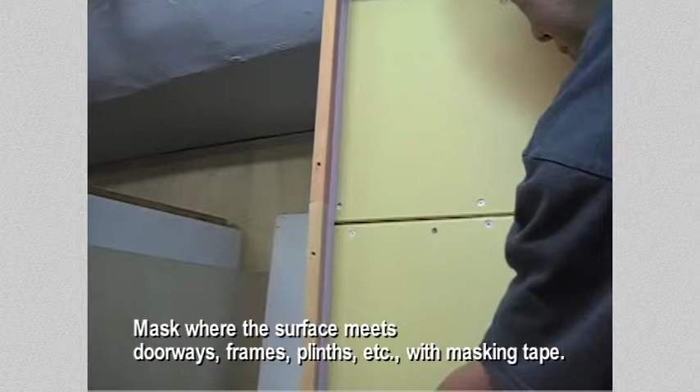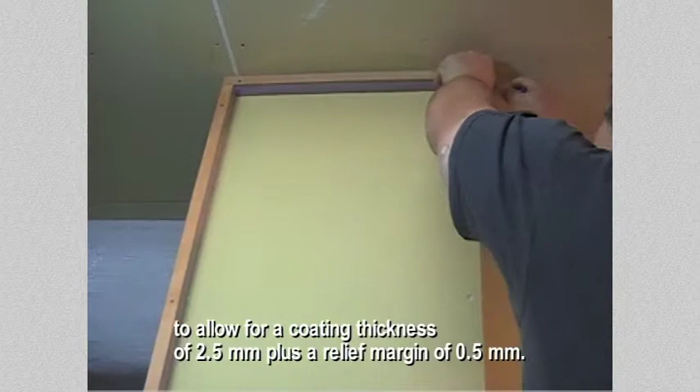Biocera Light. Application procedures. Base preparation. Mask where the surface meets doorways, frames, plinths, etc. with masking tape. Apply masking tape 3 mm away from the board to allow for a coating thickness of 2.5 mm plus a relief margin of 0.5 mm.

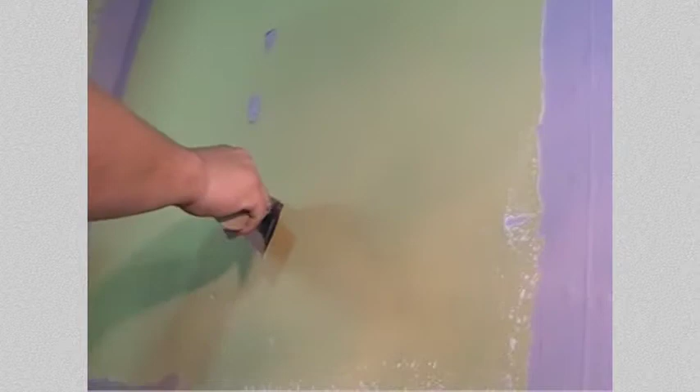Use only LN putty from our company. Mix 1 kilogram of LN putty with half a liter of fresh, clean water to make a paste. Mix only the amount of paste that can be applied within 1 hour. Cover the screw heads with the paste. Apply the paste 60 mm wide along the plasterboard joints.

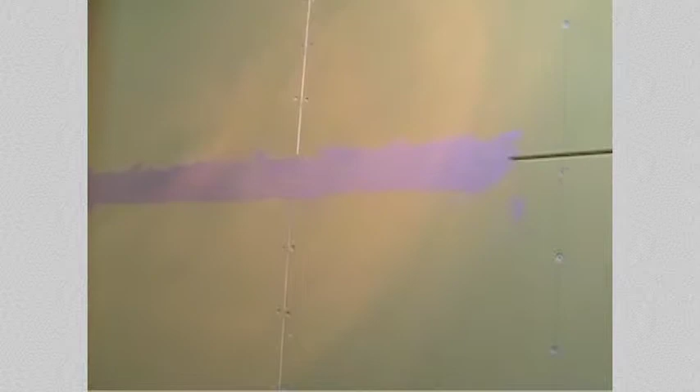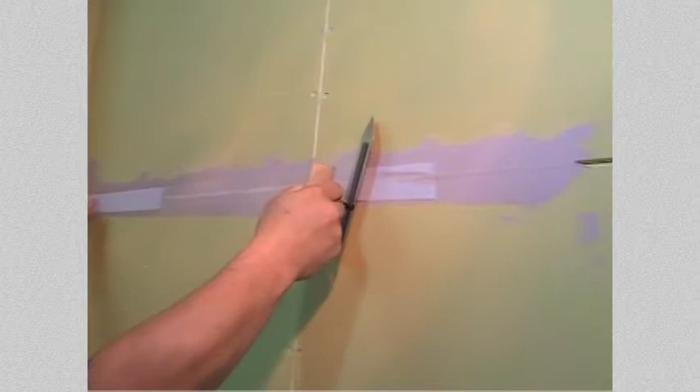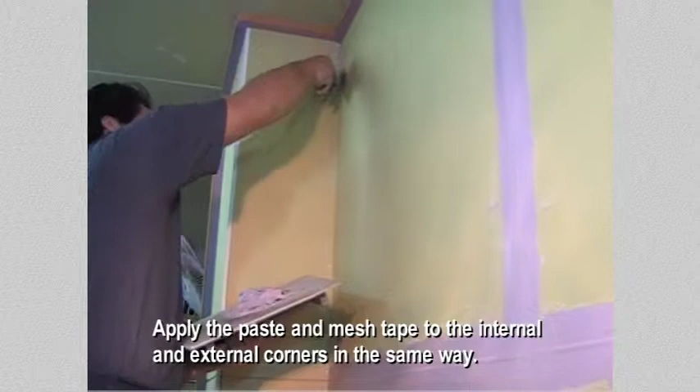Stick LN mesh tape on top of the paste and rub down the joint until it becomes smooth. Apply the paste and mesh tape to the internal and external corners in the same way.

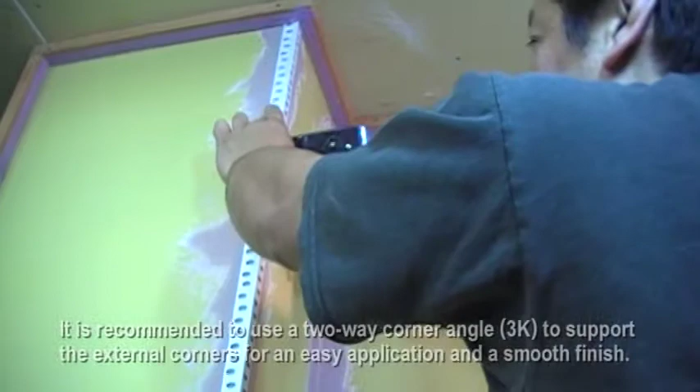It is recommended to use a two-way corner angle, 3K, to support the external corners for an easy application and a smooth finish. After a short while, the joint valleys may protrude. Press down the bulging paste with a trowel to smooth it out.

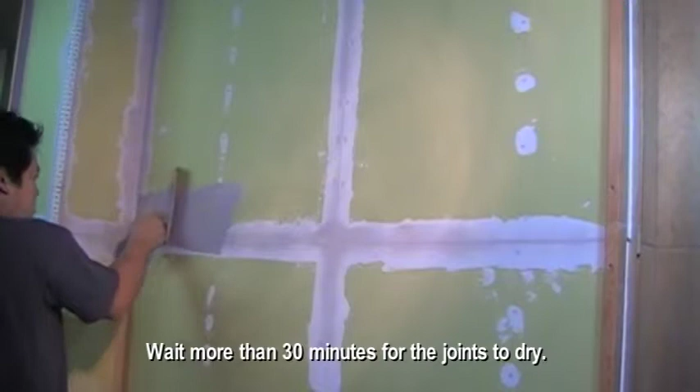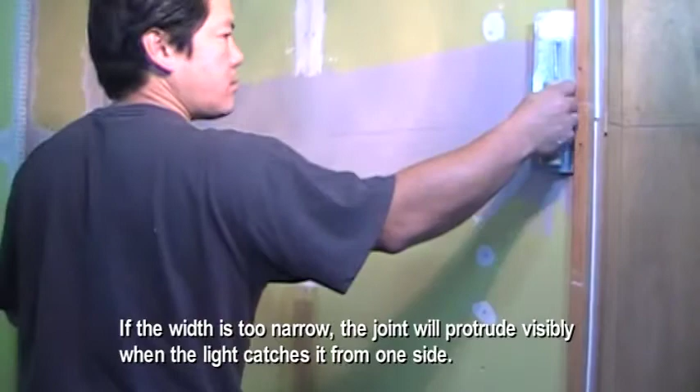Wait more than 30 minutes for the joints to dry. Apply the paste more than 250 millimeters wide and rub down until it becomes smooth. If the width is too narrow, the joint will protrude visibly when the light catches it from one side. The LN putty will turn white when it dries out.

Mixing. You will need to have the recommended amount of fresh, clean water ready. Pour some of the water into a plastic bucket for plastering, 300 millimeter diameter, first, and then add the product, and mix them with the high-speed agitator. Gradually add the rest of the water and the product while mixing thoroughly.

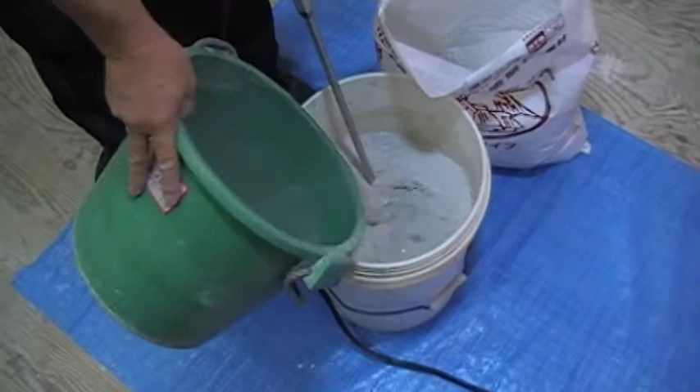To ensure a thorough mix, use a large agitator with rounded blades to prevent the fine strands of fiber in the mix from tangling around it. Remember to remove the residue sticking to the sides of the plastic bucket and mix it in too. Mix thoroughly until the fine strands of fiber in the paste disappear. Be aware that insufficient mixing can cause color irregularity. Wait for 10 minutes until the product fully absorbs the water. Mix the paste for 2 minutes.

There are a few points to be aware of. This product is a lime-based plaster. Never mix additional fresh new product with a batch already mixed. You cannot use mixtures made from different mixing times on the same surface either. You should therefore calculate the amount of materials needed to cover the wall in preparation for mixing.

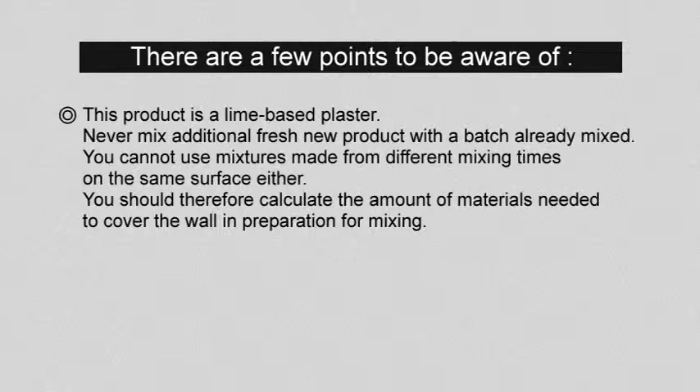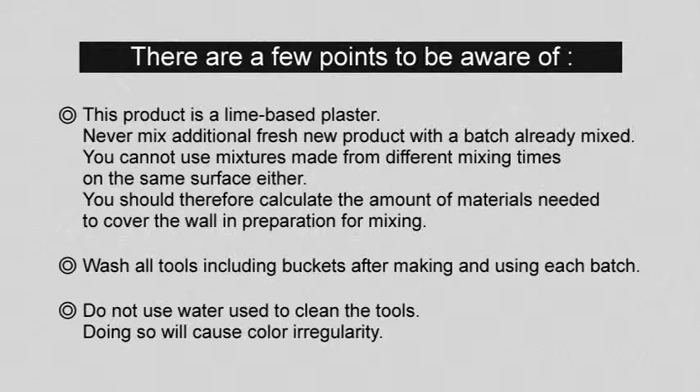Wash all tools, including buckets, after making and using each batch. Do not use water used to clean the tools. Doing so will cause color irregularity. Always add only the specified amount of water and carefully follow the mixing times for pre-mixing, settling, and final mixing. Avoid applying when the air temperature is 5 degrees Celsius or cooler. If this is not avoidable, manage the room temperature as carefully as possible.

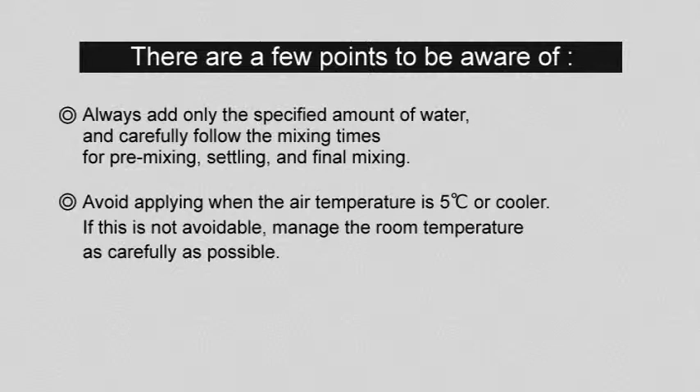Application. There are a few points to be aware of. Finish the application within 1 hour after mixing the product and water. If you apply a layer of the product of less than 2.5 millimeters, it may fail to harden properly, or color irregularity or pattern defects may be caused by aggregated rolling. Close windows and entrances for a period of up to 12 hours from the time of application to protect the surface.

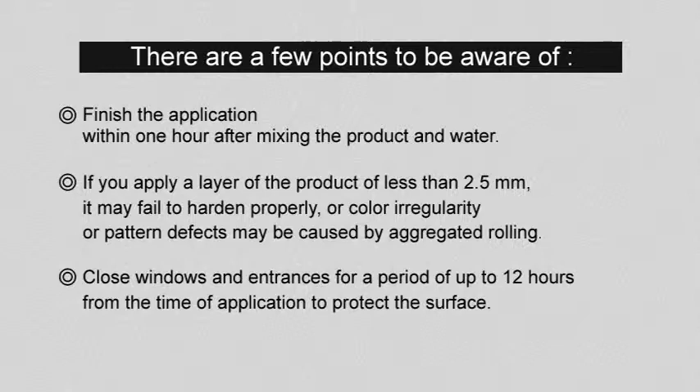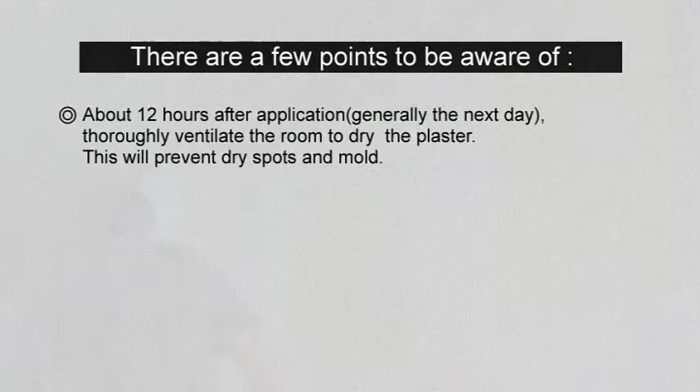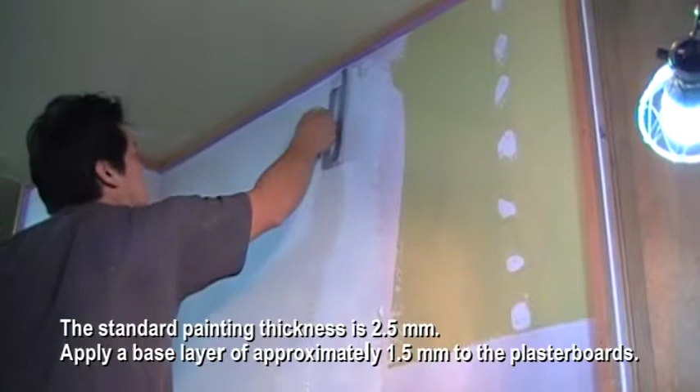About 12 hours after application, generally the next day, thoroughly ventilate the room to dry the plaster. This will prevent dry spots and mold. You can apply quickly as the base layer does not have to be uniform at this stage. The standard painting thickness is 2.5 millimeters. Apply a base layer of approximately 1.5 millimeters to the plaster boards. This will help the finished surface to dry evenly.

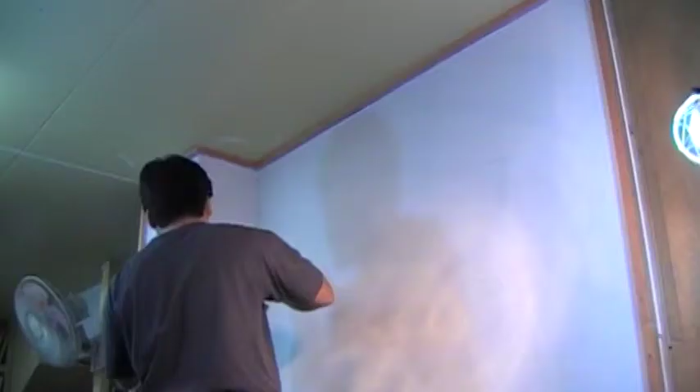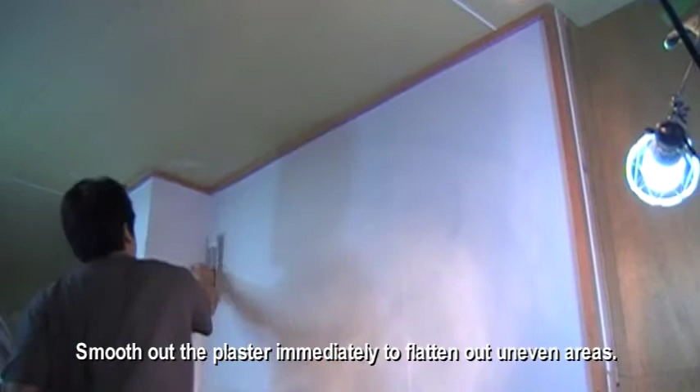Wait for 10 to 15 minutes after applying the base layer before applying another layer of 2.5 millimeters. Smooth out the plaster immediately to flatten out uneven areas. It is okay to leave some strokes of a trowel. Do not plaster repeatedly.

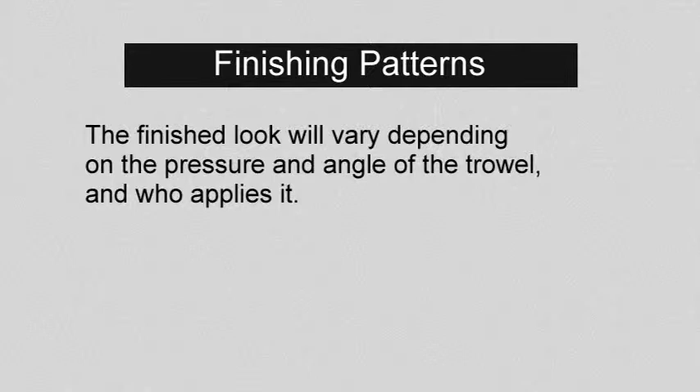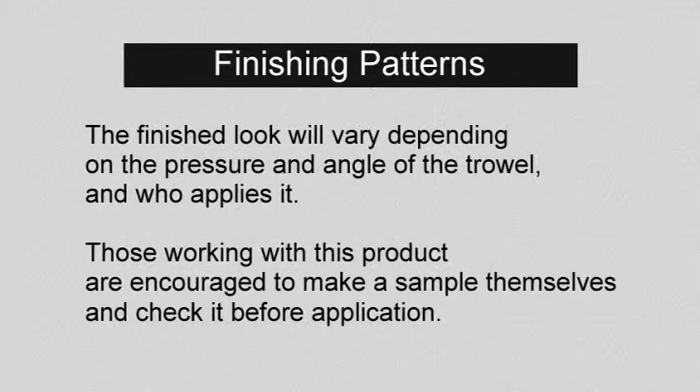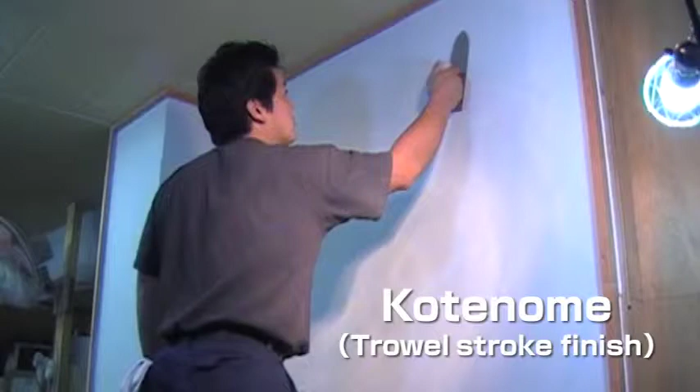Finish. Finishing patterns. The finished look will vary depending on the pressure and angle of the trowel and who applies it. Those working with this product are encouraged to make a sample themselves and check it before application. Kotenome, trowel stroke finish. Hold the finishing trowel flat on the surface and move it as if you were pulling the plaster. Move it as if drawing a figure 8 resting on its side.

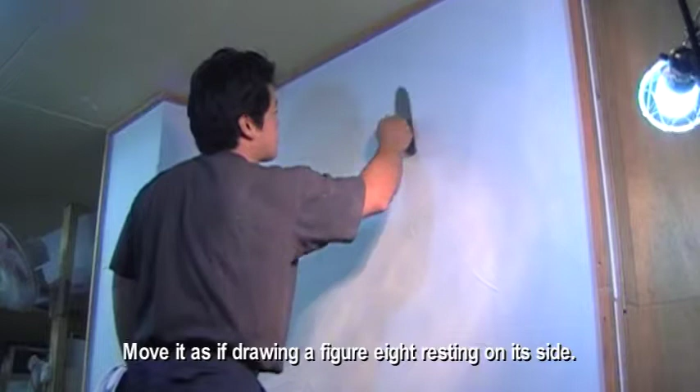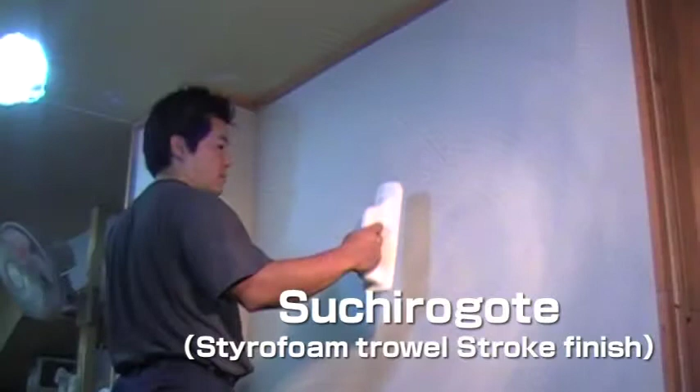Suchirogote, styrofoam trowel stroke finish. Smooth out the surface with a styrofoam trowel and move it from right to left as if drawing fan shapes.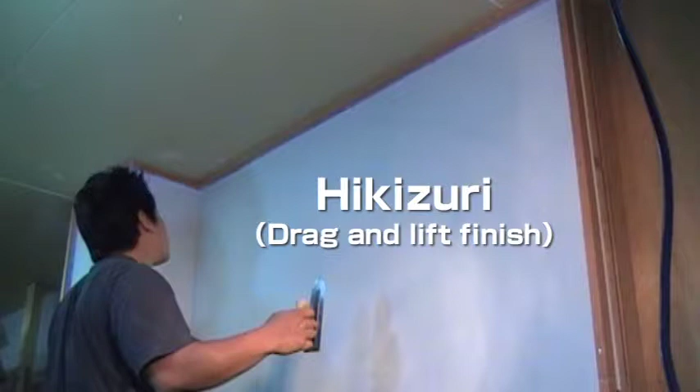Hikizuri, drag and lift finish. Hold the finishing trowel sideways and press the tip down while dragging it back about 15 to 30 centimeters from left to right. Repeat the strokes in rows in an alternating pattern similar to rows of interlocking bricks.

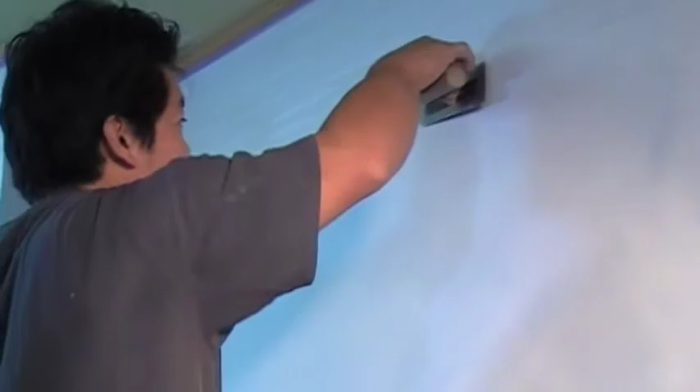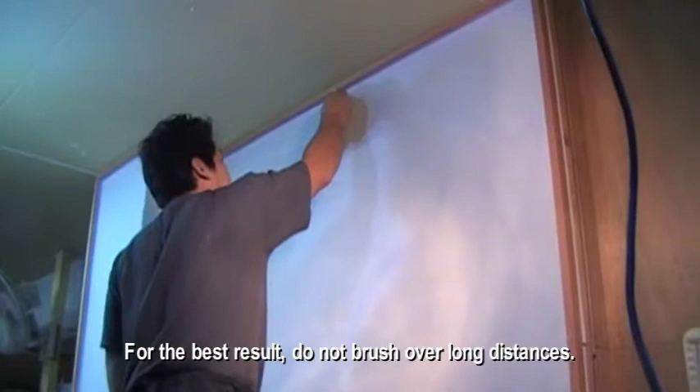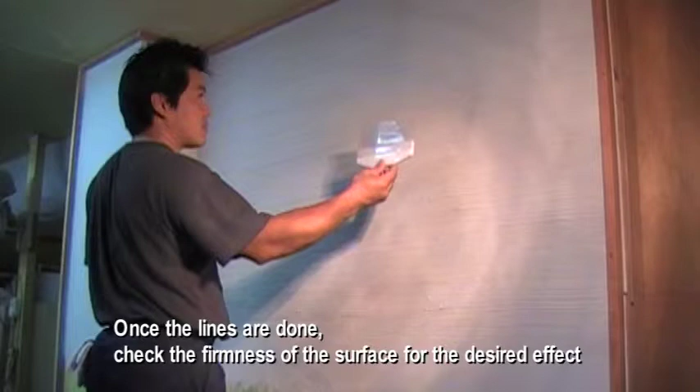Arabake, coarse bristle brush finish. Slowly brush the surface horizontally with the specified bristle brush. For the best result, do not brush over long distances. Instead, use short strokes of about 50 to 70 centimeters long. Once the lines are done, check the firmness of the surface for the desired effect and lightly flatten the grain lines by skimming a plastic blade horizontally over the surface.

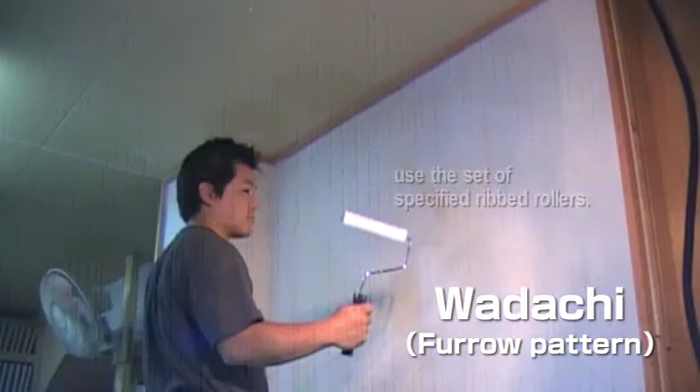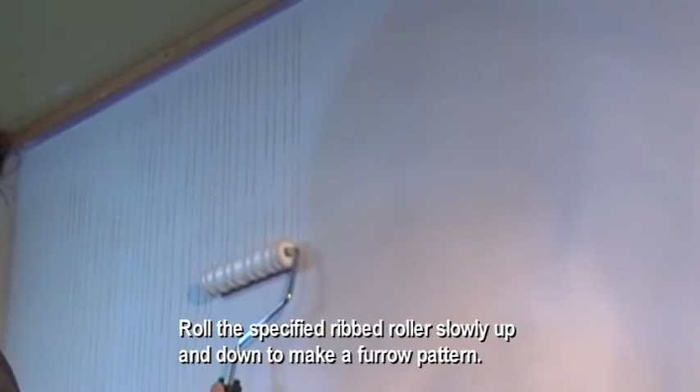Wadachi, furrow pattern. Use the set of specified ribbed rollers. Roll the specified ribbed roller slowly up and down to make a furrow pattern. Then move the roller one groove width to the right to make another furrow pattern, this time narrowing the width of the furrow.

Be sure to read and understand these procedures thoroughly before applying this product. Takachiho Shirasu Corporation.